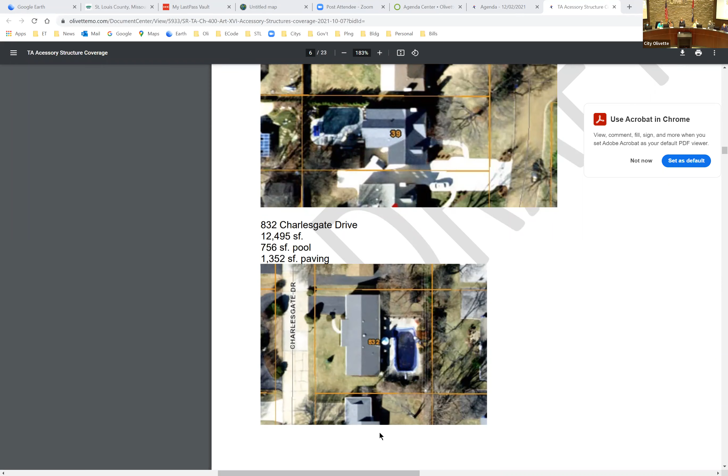My understanding is what was requested from the commission at the last meeting was the ones listed on this page. These are the ones that were issued or reviewed for permits this calendar year. The commission did ask for about 10, and this was at least what was issued and reviewed this year.

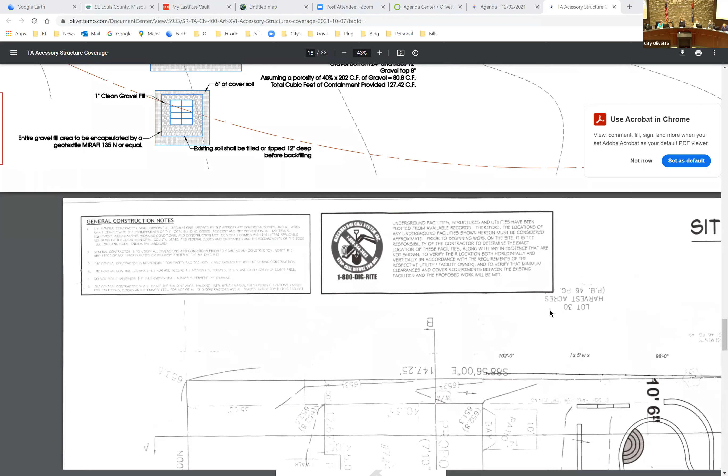It was a little bit more difficult to go further back with the other items. And in the PDF, one of the requests was to actually see them, but that was in the PDF and not in the printout packets you have right now.

So this one here is in St. Alfred, and it's actually getting ready to go before the Board of Adjustment. There, for the purposes of the setback, it wasn't an issue of the total area or size, and it wouldn't be - it would still fall well below the threshold even if this ordinance change didn't occur.

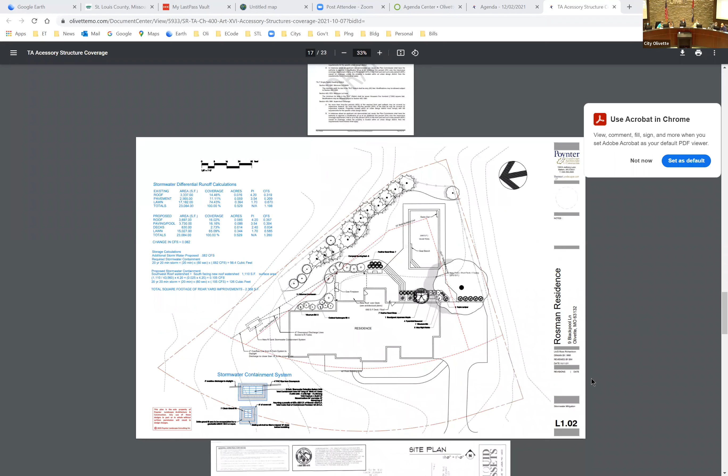Then you had a 724 Cherry Tree. You had one on Villa, and that was at one of your last meetings, I think in late October or early November. And you had this one on Glenmary, which was a sizable one.

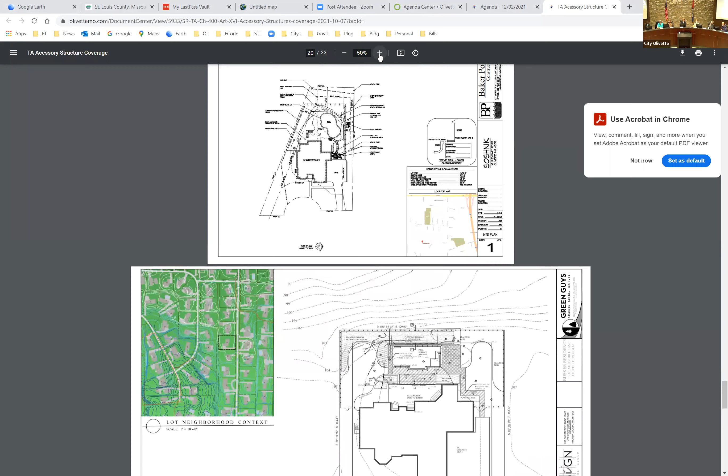Can you zoom in on that? The pool doesn't look too big, does it? Is it the pool deck? It wasn't necessarily the pool, it's the coverage - look at the coverage table on the side, look at all that concrete and sidewalk around it.

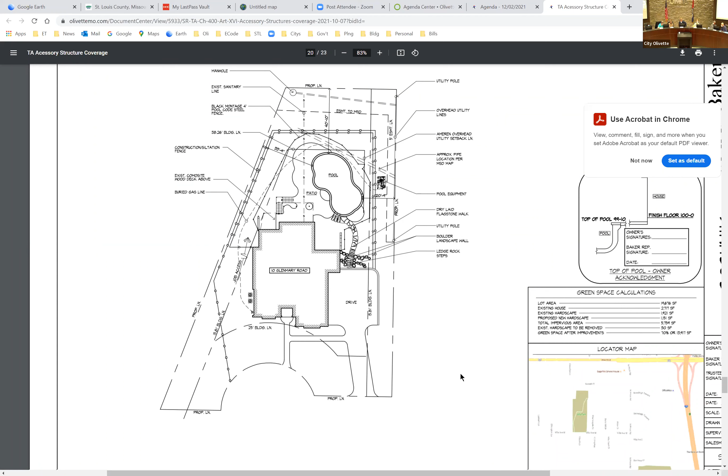Interesting. So are you looking for a vote tonight on this? No, the purpose is just to make sure we're going in the right direction, and then to have a final ordinance prepared for you to look at at our next meeting.

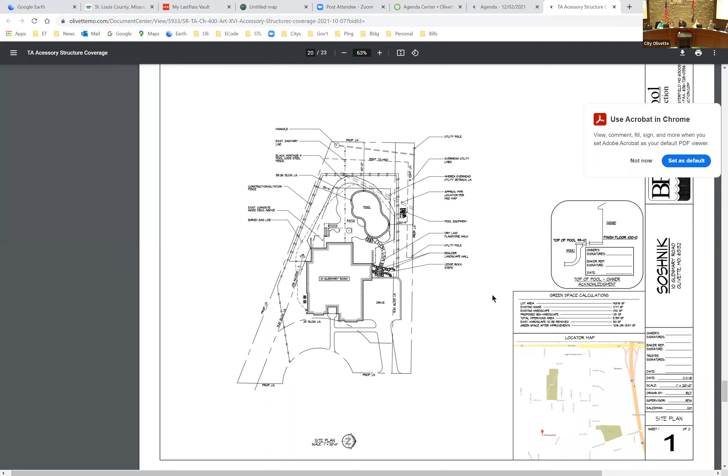I personally think it's in line with what we talked about last time, and it makes me feel more comfortable seeing the percentages. Yeah, it's good. I do too, I like it.

It doesn't deal with every question we have about accessory structures, every problem, but it's a good way to chip away at this piece of the park.

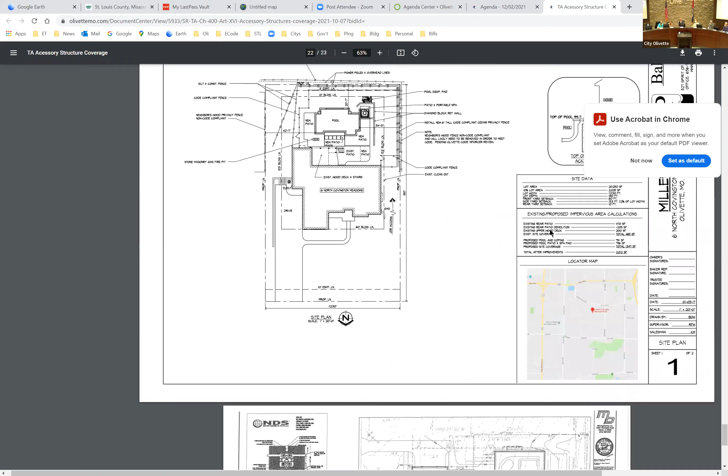We do need to address public comments related to this. We do have one person that would like to address the commission. Before that, since it's limited to about 3 minutes, I want to go over some of these issues so he doesn't have to go through that whole process.

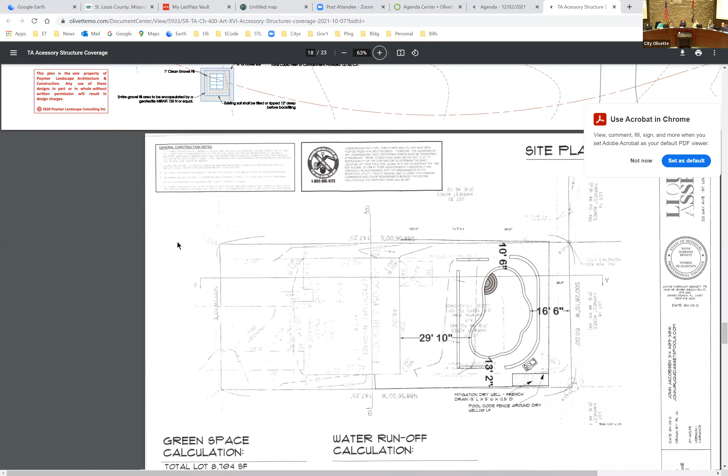So this represents the property at Cherry Tree, and this is what initiated the matter because it went before the Board of Zoning Adjustment. It's a property under 10,000 square feet - a little over 8,700 square feet. The house footprint itself is smaller than what they could have built, about 500 square feet smaller than the max.

There's an existing patio, almost 200 square feet. Once they had their flat work and their pool, they were up - again, this property was 8,700 square feet, round numbers, so that would allow them 870 square feet of accessory structures. That's pretty small, but it's also a very small lot. Even though the percentages adjust for a smaller lot, it really adds up right away.

With the smaller house footprint, they don't get that extra bonus, so they're even below what the maximum cap would have been. They came to the commission, and the original application was probably asking for 1,700 square feet of accessory area, including the pool deck, the connection, the existing patio, and the pool footprint. They reduced that amount before petitioning to the board, and I'll show those numbers in a second. They were still far from what the board felt comfortable considering, because it was difficult to establish a hardship, but they did authorize the property to go up to 13.75%, getting them closer to 1,200 square feet.

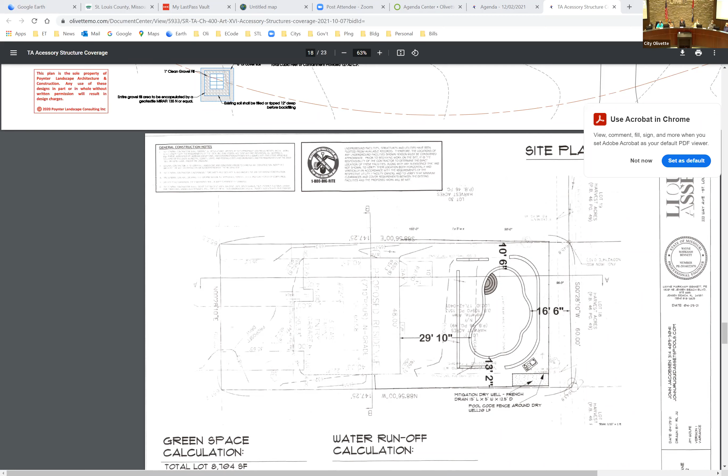The lot area is 8,700 square feet, so 10% of that is 870 square feet. They went to the Board of Adjustment, which said they can go up to 13.75%, giving them nearly 1,200 square feet of accessory structure. Their existing patio is 198 square feet. The original proposed deck was 725 square feet, reduced to around 400 square feet. There was a connector of roughly 250 square feet, and the pool size was 651 square feet. If I only count 50% of that pool, it's about 326 square feet. They would total 1,499 square feet, or 17%, still well above what they would be authorized through the Board of Adjustment. So they're still 300 square feet over.

So this ordinance still does not address their full issue, but the intent here was that we weren't drafting this ordinance specifically for one lot. I did want to show you those numbers, and I think Mr. Trainin wants to talk about them, so you have a background and he can focus on what his goal was.

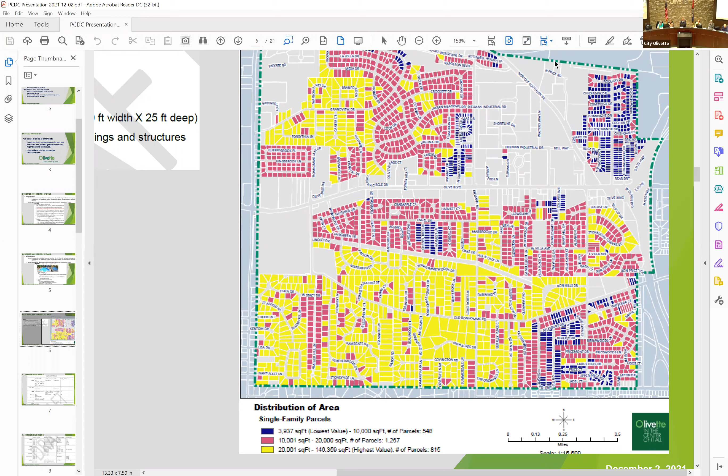But we do have, these are dilemmas that we face, with trying to balance out the needs of the residents as far as the amount of infrastructure that we have. We'll take that in consideration. We appreciate it. We're not going to get to defining that until, I believe, another meeting. I think we're going to really just concentrate on the percentage of the pool at this meeting.

So definitely pay attention to the meeting agendas because there'll be other opportunities to speak as well. Thank you. Anything you can do to help me, I'd appreciate it. I'd like to get my pool built and improve my property and make my family happy. Thank you, sir. Appreciate it.

Yeah, and I agree, it's a different conversation—the percentage of the pool is one topic. I brought this up last meeting. I do feel there's a valid argument that when we look at a property that's 9,500 square feet, 10% is 950, versus a property that's 19,000 square feet, they have 1,900 to play with. If they both want to put something in accessory structures that is 1,000 square feet, one's authorized, one's not.

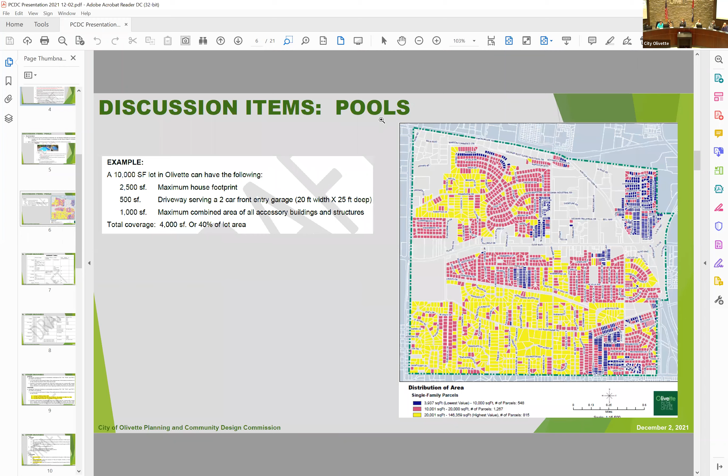Sorry, Jody—so are there any recommendations, like if you have this big of a pool, you need this much decking just to make it work? Not opposed to that, just saying, here's your pool and you only get this much deck—but what's the recommendation for when you build a pool this big, you should have X amount of decking around it? That's a very good question. We could argue this to the end of time, but what are the actual recommendations out there—if I'm building a pool this big, how much decking is recommended? So you're looking for a standard? A standard, or just some suggestions between X and Y size.

Say a 20 by 40 or 20 by 30 pool, which would be 600 square feet—how much decking is recommended? Have you ever seen anything like that? I've never seen it, but I was curious about that while looking at 724 Cherry Tree Lane—they had a proposed pool of 595 square feet and an estimated pool deck of 407. Then at Carlos's, I believe he had 750 square feet of decking. That's a big difference between 400 and 750.

And that's really the 300 the gentleman was talking about too. Right—the quantity is also going to be based on the perimeter of the pool. If you've got an irregular shape, it may require more than a standardized rectangle. I don't know that there's a way to quantify that as a standard. Or look at the two drawn together, like 300-400 square feet around the deck versus the 780 they wanted, to see what the true difference is—how does it aesthetically look and function, because you want it to be safe.

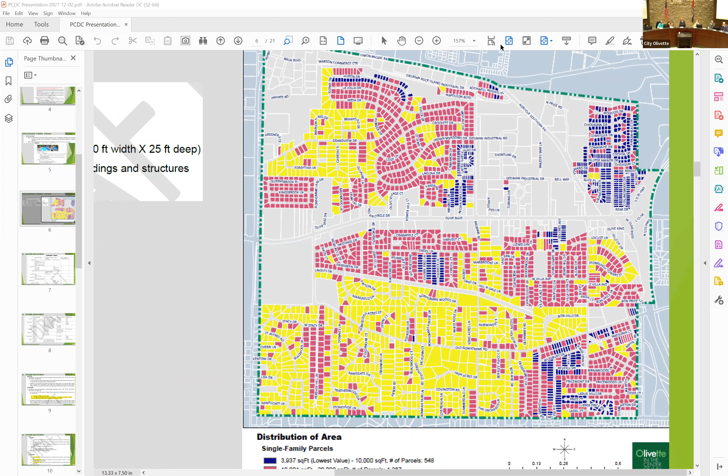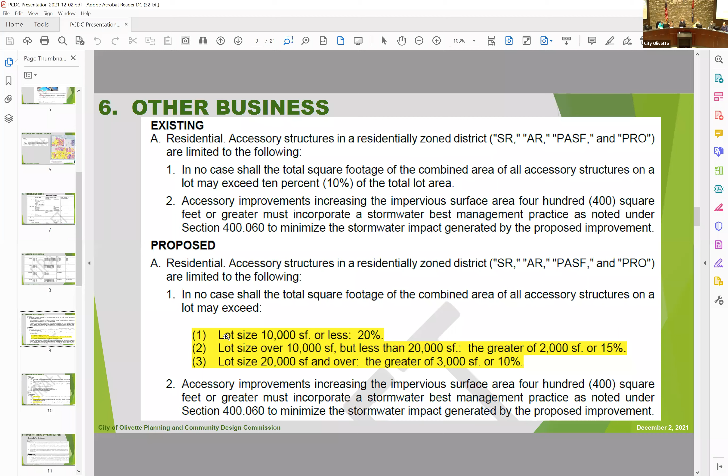I'm fine with it, but unless you guys want to think it over, mull it over in light of everything else. I don't want to push anybody for this. I'm okay. I'm okay with the change.

So we'll have a formal memo drafted along with the recommended motion at your next meeting on the 16th. Great. Okay, let's move on to item, well I guess it's not a B, but we'll move on to chapter 420, stream buffer regulations.

So several years back, the city adopted a template ordinance that was prepared by the Metropolitan Sewer District, and we adopted the ordinance without any changes to that in there. What that ordinance was intended to do was to protect streams, and there were two components to it: one, to protect the stream bank, and two, to help filter impurities, stormwater impurities, going into the stream bank. So it had a dual purpose in there.

In hindsight, it had a pretty significant effect on properties along Olive, throughout all of Olivette, not just on Olive. I'll show you a visual in there. What we saw more or less was that people were petitioning for variances based on the fact that the stream bank wasn't natural anymore. There were channels, concrete channels or Gabion wall channels, and therefore the spirit and intent of protecting the natural stream bank, and I think it uses the term undisturbed natural vegetative buffer.

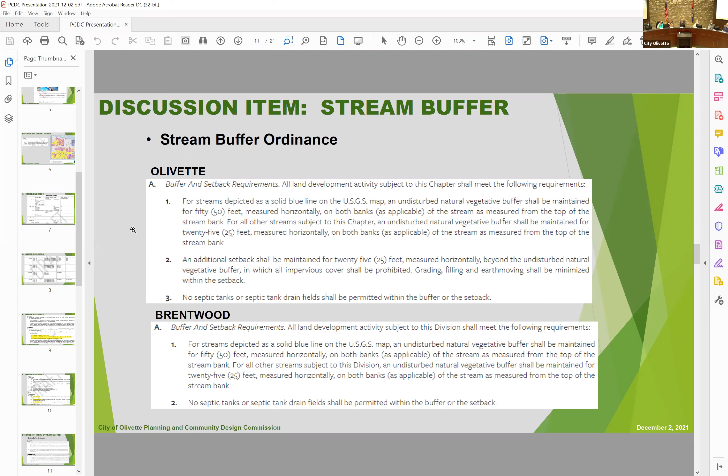So we talked about this back in October. You have a staff report that recommends that the commission have the authority to waive the requirements for the undisturbed natural vegetative buffer if it's an artificially modified stream bank. And to ensure that when doing so, we still look at any inlets that direct water into the stream, that there's some type of system to ensure that the stormwater is purified or filtered.

Now, in the written report before you, I had some repeated words, and I apologize. It's been corrected here on the visual, but you'll see that this paragraph, the C second paragraph, has been modified compared to what's in your report.

But anyway, what this would do, again, is redefine how the buffer is applied. The buffer is based on the U.S.G.S. maps, and if that map shows a solid blue line, you have to have a 50-foot undisturbed natural vegetative buffer. Well, in all of Olivette, there are no solid blue lines.

We don't have any of them identified as that. But we have what they call other streams. And in those other streams, the current code requires you to provide a 25-foot undisturbed natural vegetative buffer on both banks.

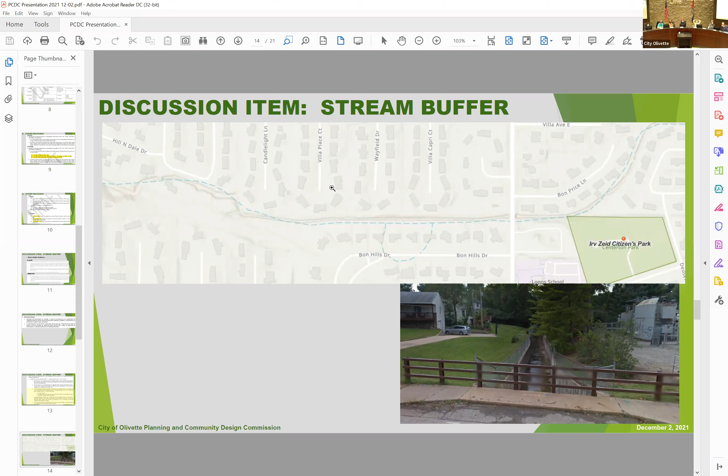So I'll show you an example of one here that will pop up on your monitors and screen, bear with me, I'll get a little closer. But this is right by the temple. You can see, if you're familiar with it, there's a concrete channel that runs along this area.

When we adopted that ordinance, all of these properties were impacted and required a 25-foot undisturbed natural vegetative buffer, even though all those properties were already built out up to that wall, plus an additional 25-foot setback to allow for the filtration of sediments going into it. And it basically minimized any rear yard activity in those properties.

Three of those properties have gone to the Board of Adjustment in efforts to do a patio. And then we've had two new homes that were constructed in that area, and they agreed to provide in lieu of those variances. Those properties did come to the commission following for their design review.

In exchange, the concern was from either the Board of Adjustment or the Plan Commission to ensure that any inlets in these properties that picked up water from the other side of the wall and just dropped it into the channel provided some type of rain garden or BMP to help filter out those sediments from going directly into the bank. That's the spirit and intent of that ordinance.

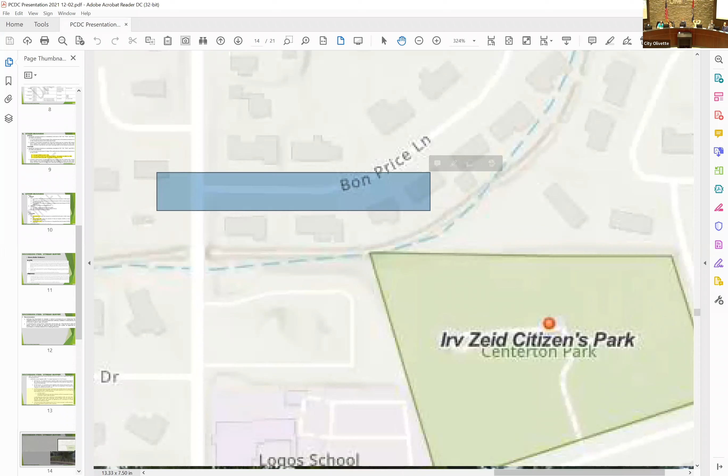You can see the USGS maps show this loop coming around here. There's nothing that exists there now. Well, I'm sure it was there at one time, but it no longer exists. And now these properties over here are impacted by a 25-foot undisturbed natural vegetative buffer and a 25-foot setback. And then this channel back here is all concreted.

Again, I don't have them up here, and I may be able to show them. This computer may be a little bit slower. There are properties out there too in the industrial park that have similar situations. I don't know if I can get those up. No, it won't let me on this. So I do apologize for that.

You're talking about Dielman Rock Island? Dielman Rock Island and also Dielman Industrial. And I'll get this up here. Just bear with me one second.

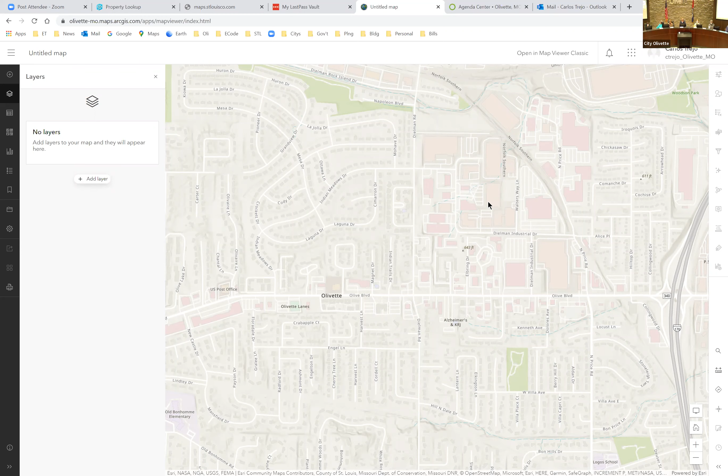Here's the example. Don will be back next week, after tonight's our last class night. But here's a good visual in the industrial park. You can see all these buildings here, and you can see the USGS stream map identifying all these right here, and they don't exist. Wow.

You know, they may have at one time, but they're well covered now. Why do we need to care now? Well, that's the intent.

The literal application of the code would limit a lot of these businesses from doing improvements. What they got would be grandfathered in, but if they wanted to do additions or modifications, we would apply a common sense approach, but to cover ourselves we would run it through the Board of Adjustment and put the onus on them to make a decision so they can continue on. It's just an unnecessary extra step.

Carlos, should we realistically put something in there since we're bound by what's on a map, but it's clearly inaccurate for it today? Can we grant a waiver based on current conditions as opposed to what the map reports? We could look at even adopting our own map and not referencing the USGS map.

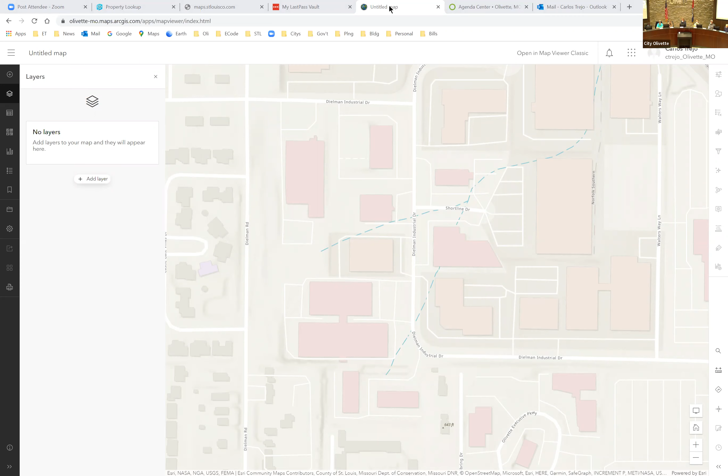When you mentioned in item C providing that above ground filter system - if they put in a filter type system or a rain garden, I assume that would be acceptable. If they did something like that, then item number 2, the additional setback wouldn't necessarily apply.

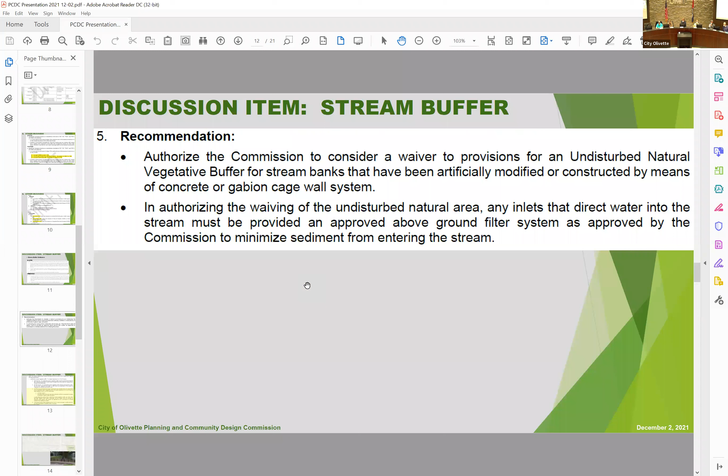Because isn't the intent for the additional setback to clean? Well, there would be two aspects to that. The 25 foot undisturbed natural vegetative buffer would essentially go away, and that other setback would get put in. The setback would still happen - that's what the intent is.

And bear with me as I get the language just to make sure I understand it. It's a good point, and that was one I was kind of mulling over.

There would be the way it was laid out, kind of following what the existing language was - I broke it up so there's the solid blue lines, which I know we don't have any, and there are all other streams, meaning that they're existing. Now, some of these other streams now have artificial banks, so the commission would waive the requirement to do an undisturbed natural vegetative buffer.

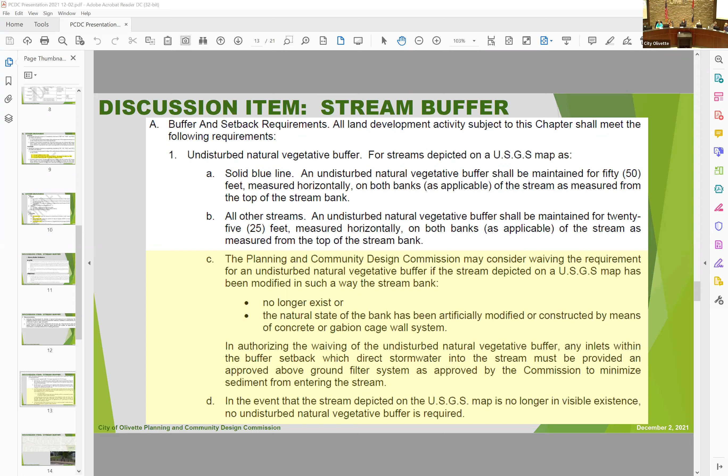It was a shock, I didn't know, but Rick Knox has a long history in Olivette, our former police chief, and he's an exciting guy. As I said to him, you are the male version of Missy Waldman. So while I didn't know it and it was a shock, it's a good situation, a good decision. He's a very mindful, very caring individual, along with the people who interviewed for that process. They were all very good in stepping up and providing their input. I was impressed with a few people, and I hope that they hang around.

And it was a quite successful turkey trot, a very, very successful turkey trot. Thank God the weather was beautiful, we didn't really get that cold until later in the afternoon. $14,000 raised, and the number of participants was nice, including the virtual participants, and the volunteers just continue to shine every year. God bless those, like Mr. Lewis, who chose to be there at 5 o'clock in the morning to get prepared for this event.

As well as Mr. Spiegelglass. So it's always a good thing, a really good community opportunity and event. So you all did a really good job.